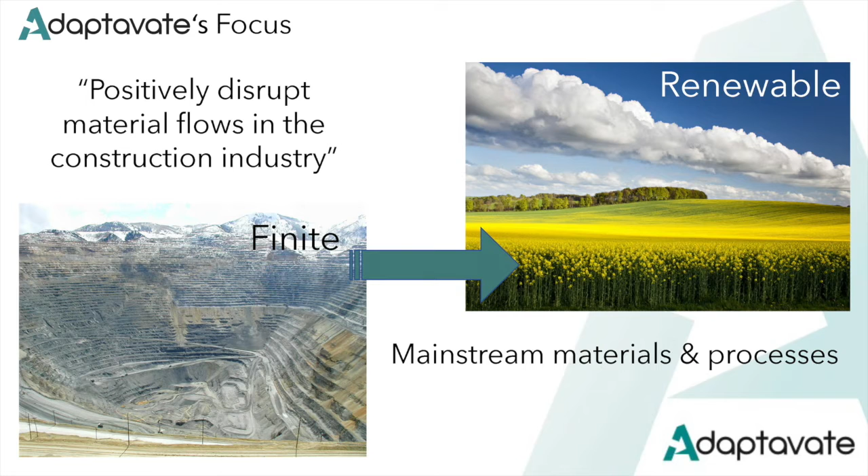If we want to do that, as an impact-driven business that can be a force for good, we need mainstream materials, made on mainstream processes, so that people like you and I sat in this room today can really witness the benefits of these things. So we have two products at the moment.

One is on the market, called Breather Plaster, which is an internal plaster system, and the other is Breather Board, a direct alternative to plasterboard. They are both compatible drop-in alternatives to the incumbents in the market, meaning any tradesmen or women in the industry, or anyone specifying or using products, can use these materials just like they would the rest of the materials they use so commonly.

These can be used together, and they can be used separately. It should also be said that Breather Board is not currently on the market, but we are working hard to bring it to market.

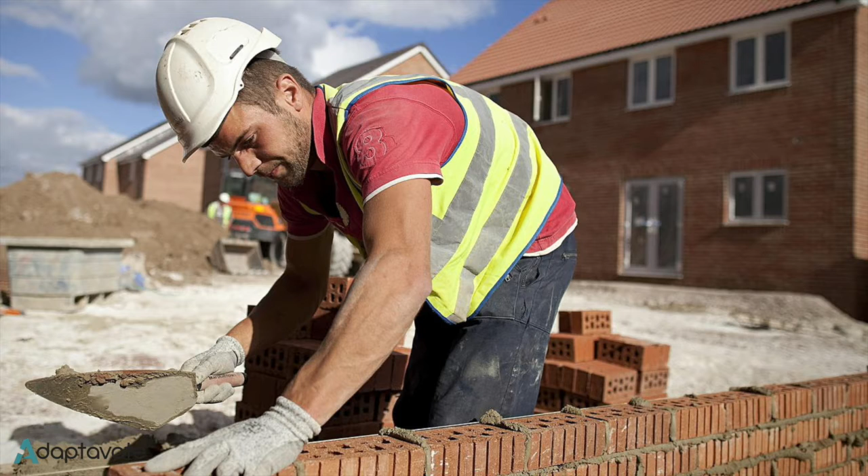So my story starts on a building site. I used to be a builder, and I worked for Alex for a little bit, and fortunately got out of it, so that's good. I started on site renovating buildings, trying to affect buildings with my hands, one by one, and I tried to make the building I was working on the best building I could have an effect on.

I wanted to think about this in a different way, so I went and studied a master's in sustainable architecture at the Centre for Alternative Technology, who have a stand around here. Anyone wanting to become educated in sustainable architectural practices, I suggest you go have a word with them. They have very flexible courses and produce very capable, game-changing people in the industry, just behind us in this wonderful area.

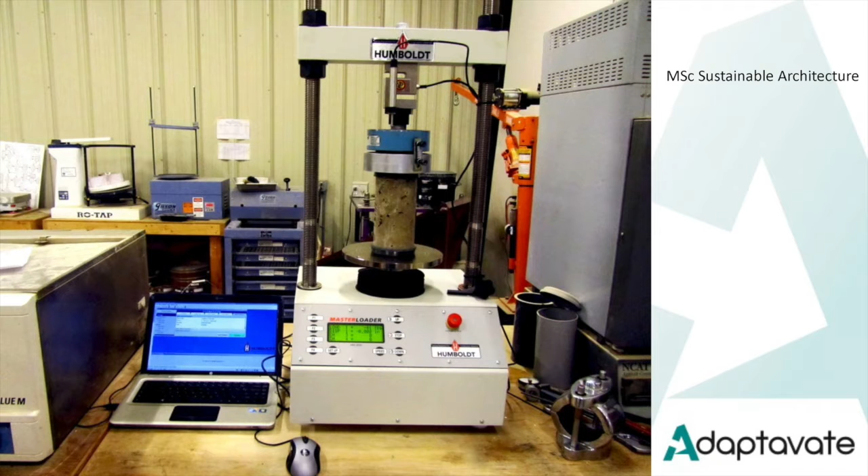Through my thesis there, I wanted to develop a composite that could be used instead of plasterboard. So I spent however many months testing, iterating, and trying to develop composites that could be used as an alternative to plasterboard.

I gave myself a very tight design specification because this was driven by impact. At the fundamental core of all I was thinking about was ecological sustainability, ecological consciousness. I read a book by Yvon Chouinard, founder of Patagonia, about how businesses can do good and lead by example - that's an underpinning thing that sits underneath all of our work.

But for our materials to have the widest uptake and benefit in the market, they needed to meet standards, because if you can't meet standards, you can't get into the mainstream market. Alongside that, the solution had to be usable by the guys and girls on site, or the people specifying or using it - that's important, because if your product gets to site and needs retraining, you've got a challenge there.

Roland's done some great work around standardizing earth and how you can standardize that for people to work with. Let's try to think about material offerings that minimize the barriers to market. We also said they need to be renewable and compostable, as I shared earlier - that's really important because it's the whole circular notion of the business model. Then they have to have performance - that's the reason someone would specify it in use, or want it on the walls of their building.

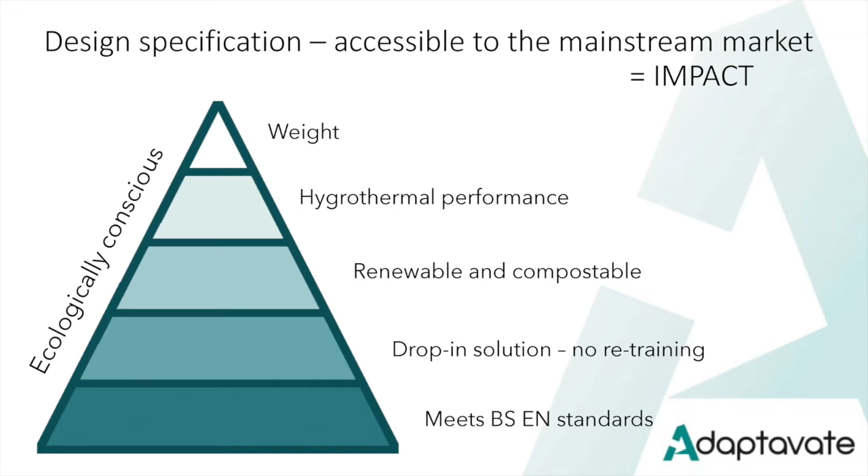In America and Canada, where there's a big market for our product, and we're growing into, weight is massive from distribution. So that's quite an interesting thing, if you can save weight on a product that has a big distribution cost.

So the problem I was trying to really solve was this, and the gents here have spoken about it, and I'm sure I'm preaching to the choir. But energy efficiency of buildings is trying to be addressed, and then it's not, and then it is, depending on which way the wind blows. But let's just take it as it is, that we need to increase the air tightness of the building, increase the thermal fabric of it.

Well, the problem is that you and I and our families and our friends all produce moisture. We were born with that ability, and it's about 14 litres of moisture a day an average family gives off. Now, if it's an airtight building that's quite warm, where is it going? We have to rely on some methods to be able to regulate that moisture. If we don't do that, mold builds up, and I'm sure we've all seen problems with that.

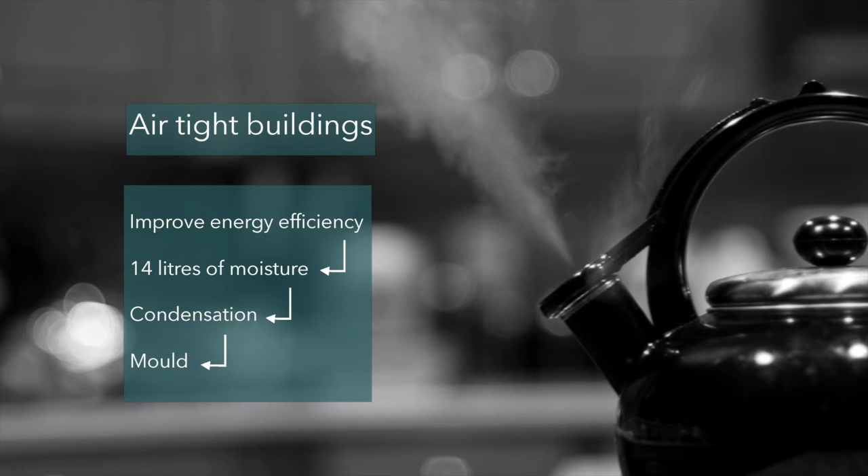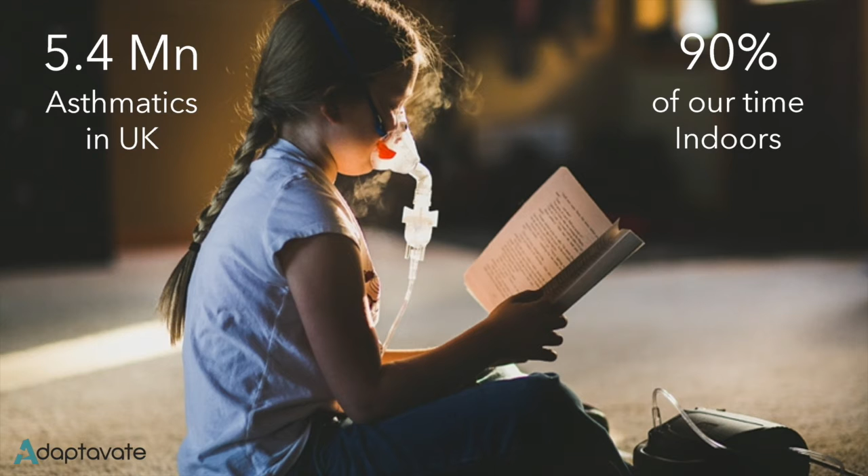So that's a problem, and it's an increasing problem, and it leads to asthmatics, and there's a lot of them in the UK, and even more around the world. And we've already heard, well, it's between 80 or 90% of our time indoors. It depends on where you live and how you live your life, but we spend an awful lot of time indoors.

On top of that, it's not just about moisture, it's about VOCs, volatile organic compounds, and they're the things that make you feel a bit poorly, and they can also give you things like cancer. In the news, we hear a lot about outdoor air quality, and in cities such as the one we're sitting in, the outdoor air quality is very bad. But the challenge is actually in your lounge, or your kid's bedroom, the pollutants can actually be 10 times that concentration than in a city centre.

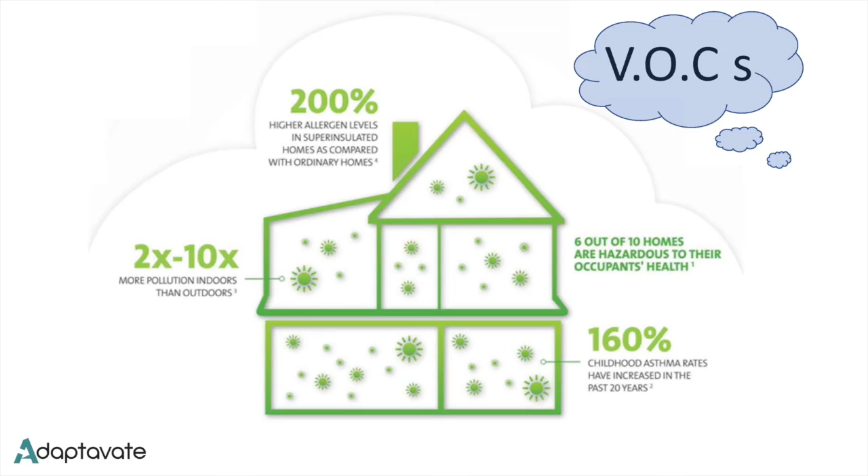Mind-boggling, isn't it? So if we spend all this time in these buildings, then we best create some buildings that are good for us.

There's another kind of global issue, if we take a step back for a second and pull our heads out of a building, if we just look at health on a broader philosophical level of an Earth's health, we're putting stuff into holes in the ground, the holes in the ground are filling up, and people are now charging us to put stuff in holes in the ground. Construction as an industry, we're quite wasteful. So that's a challenge. Plasterboard is like 240 quid a tonne to get rid of now, depending on who you are and where it is. That's in the UK.

Health, again, the world's health, we're using finite resources. Finite means it runs out. Now, that's a challenge because we've got a growing population and a global demand, an increasing demand for products. So how are we going to think about this in the future?

Well, for me, that's a commercial opportunity, and it's a health opportunity for us. So what we do is we use biomaterials. We take wastes and byproducts from the agricultural industry, straws and whatnot, and we put them into our products. And what that does is it displaces the finite materials, but it also gives some really cool benefits. Some of them are what the gents have said already today, so I'm not going to go over them all in great detail again.

But biomaterials can actually give you good thermal performance, saves you energy, good. They're lighter materials, we spoke about the benefits there earlier. The lungs to breathe, we've spoken about moisture buffering and how materials can sort of absorb and desorb. Well, biomaterials, this stuff, has got capillaries like your lungs, but instead of it for oxygen, it has the ability to absorb and desorb moisture, and that's really good, and we'll come on to that in a bit more detail. They're renewable and they're compostable, so that's good.

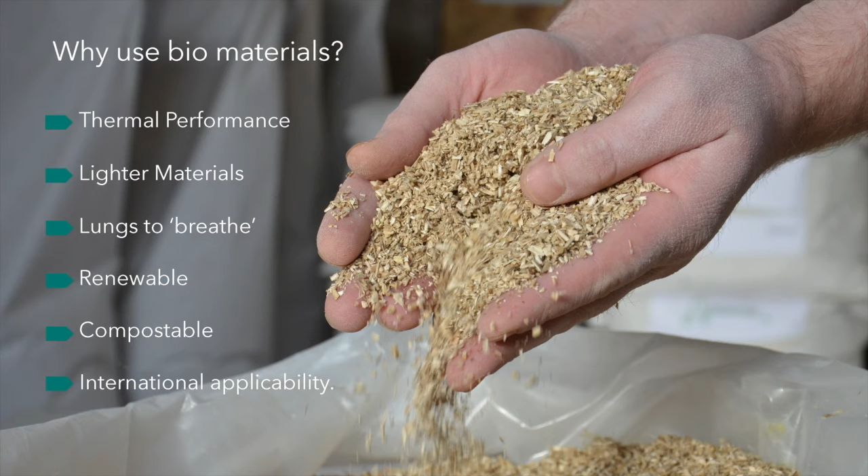That's disrupting the material flows. But what's really cool, and the way you can have the most impact, is how these waste streams can have international applicability. In the UK we use certain feedstocks, but our business vision and impact can come from working with you in Canada, the Middle East, and Australasia - you all have different feedstocks abundant in your areas. What we do is characterize these and put them into products relating to your territories, and that's how you can have widespread disruption.

So Breathaplasta has been used on some very cool projects recently. It has benefits in terms of absorbing and desorbing moisture. It's quick setting, so having come from a building background, it needs to be quick setting like the rest of the plasters on the market, so anyone can pick it up. They put the first set on, go for a brew, come back, put the second set on, go for another brew - that's what tends to happen. Then you come back and trowel it all up and you're done. It has all the benefits the gents have been talking about this morning.

This is the Conduit, a very sustainable members club in Mayfair. They used all very pioneering environmental technologies. Some of our merchants are here - Celtic, we've got Eco Merchant over here, and we've also got Mr. De La Roy from Holland, who's bringing our product into the Dutch market.

Breathaplasta - let me demonstrate how these materials work with moisture buffering. The material, as Roland says, when you're creating moisture, it has lungs to absorb it, and then when you go to work or go to sleep, it desorbs it back into the environment, and that reduces energy, and reduces problems with mold and condensation.

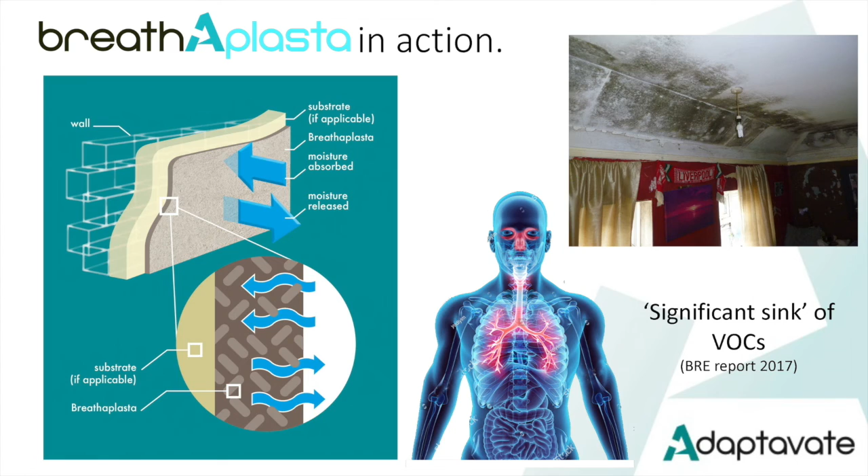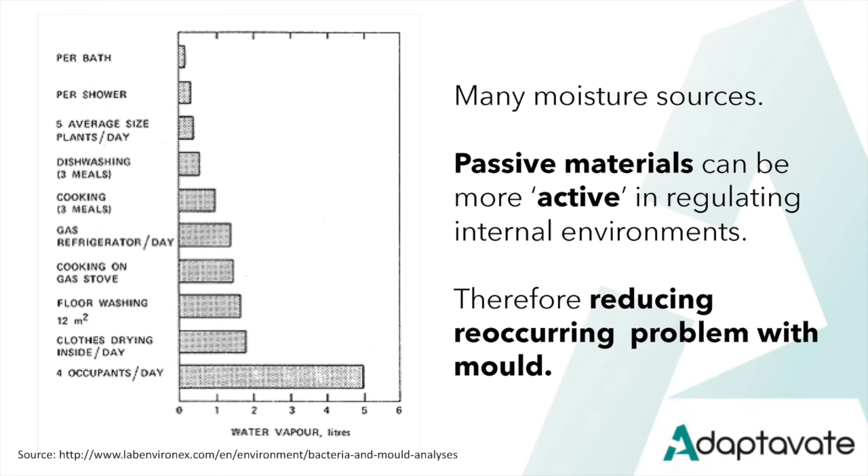But it's not just about health, it can also be about energy and cost saving. Whilst these materials may be more costly in upfront costs, upfront costs of materials in a building can only be 20 or 30% - your labour cost is the majority quite often. But if you think about the alternatives of maintaining a healthy environment in the building, there's things such as fans, and they cost to run, cost to install, and have maintenance costs, and for tenanted properties that's a bit of a nightmare. So these passive natural materials, sat on your wall, bought from a normal merchant, can actually be saving you significant ongoing costs.

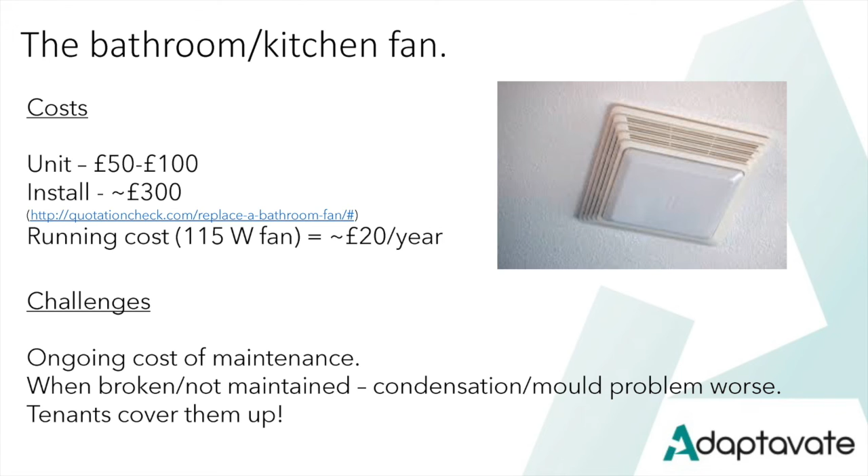We're talking at the National Landlords Association this evening, my commercial director, about the cost savings there specifically. This is another slide about that.

I'm going to finish with one last point - one last point before our three last points. Plasters on solid walls - if we were to upgrade the thermal fabric of old school solid wall buildings, just 8 mil of Breathaplasta can raise the temperature of the wall 4 degrees Celsius. Now that's the difference between moisture condensating on the wall due to it being a cold surface, and it not condensating. And then it has all these breathability benefits. So it really does have quite an impact on your building, the health of your building, and the health of the people in your building.

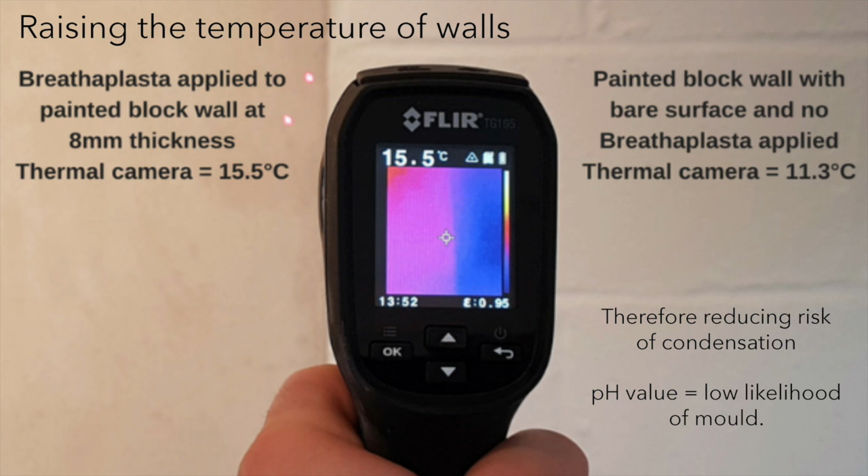And there are a great array of materials. I'm extolling the virtues of some materials that I've dreamt up, but there are hundreds of them around the corner from here, and very passionate, knowledgeable people. So if this is of interest to you, I really do recommend you go and speak to them.

I've got three cosmic conclusions just to finish with before we open the floor up for questions. Materials can act as passive regulators in buildings - that's without you having to switch them on. That was wicked imagery from Roland. But they can help improve your health and energy performance just by sitting there. The key to having a widespread impact is having drop-in, mainstreamable solutions, and that's where we're focused. And the ecological broader impact is an underlying fundamental principle on which we should be acting and approaching, because there is a significant opportunity in that space.